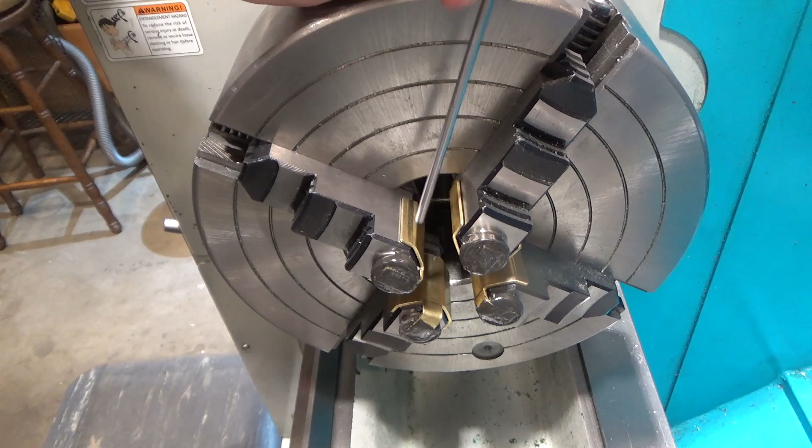So if you happen to watch one of my videos a couple videos ago, I made these soft jaws for my 4-jaw chuck for an upcoming project that's going to be rather involved. And one of the things I noticed at the end was that the placement of the magnets to hold the jaws on was on the top surface of the jaws, and that's a hardened ground surface that you can use as a reference. If you've got a part with a flange, you can slide it up to it.

So I am going to make a new version of these jaws where instead of having the magnet here, the magnet will be along the side, and it will hold the jaw in place without interfering with this surface. In order to do that, I'm going to modify my dies so that they can reference off of this wing that's going to stick off of here.

Also, since I'm going to be using the dies more, I'm also going to heat treat them, but they're made out of 1018 steel, which is only 0.18% carbon, and that's not enough carbon to really heat treat adequately, or even really at all, I think. So what I'm going to have to do instead is surface harden them, or case harden them, with some case hardening compounds, so I'll be doing that too.

And as long as I'm at it, I'm kind of curious, because these jaws move along a rail, how much they cant when you tighten them. So I'm going to put a part in this 4-jaw chuck and do some measurements and see how flat this surface really remains when you're tightening a part down, or can you really count on it if you're trying to do precision work.

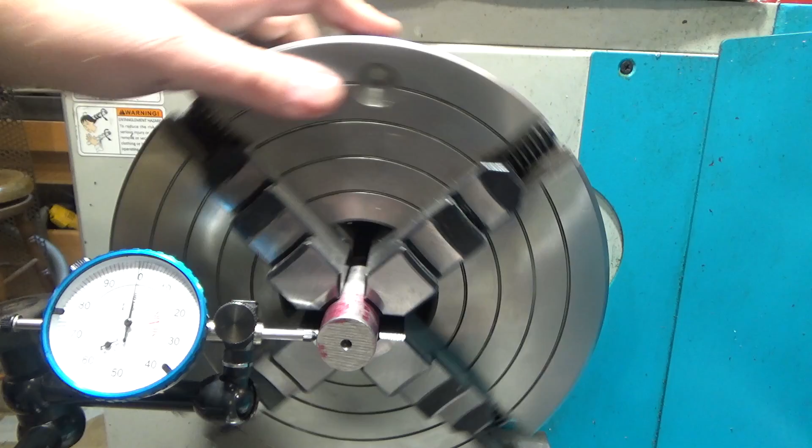So I stuck a part in here and centered it in the 4-jaw chuck. So the next thing I'm going to do is grab another indicator and put it on these flat faces and first see how well they line up with each other once it's tightened.

I assume that when they made this in the factory, they tightened all these down on something, or maybe on themselves, and then ground them flat to each other. But once you throw a part in, how well that stays flat along the travel of each jaw is an unknown here.

And then also I want to tighten just one jaw and see if it cants at all, because this rides along a track, and although the threads are engaging much of the bottom of this jaw, in reality with screws, when you tighten them, a couple of the threads hold the majority of the force and the other threads are looser. And if that's the case, this might cant a little bit, and I want to see if that's the case. So let's throw another indicator on here and see what we see.

So even though these jaws were likely all put in the chuck, tightened together or tightened on some reference part, and then ground to be flat, they only became flat at that one instance.

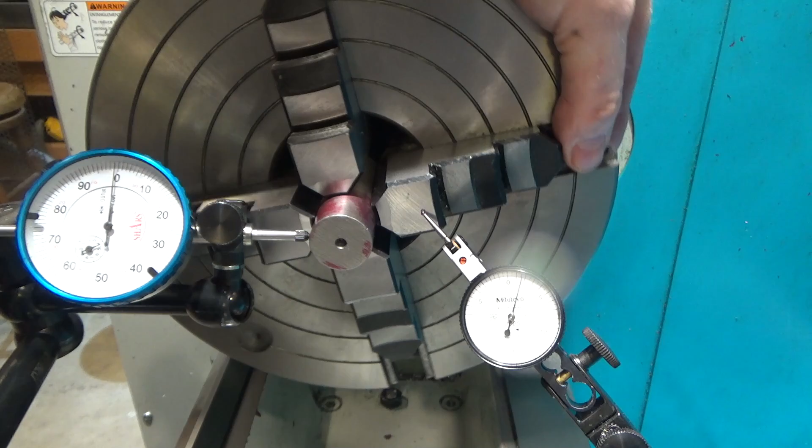And in reality, it's not terribly repeatable, my guess, because here's 0 on the jaw. You'll notice across the face of the jaw it varies by 1 thousandth. And as I come to the next one, it's plus 1 thousandth, doesn't reach the 0 at all, goes to plus 1.5 thousandths. And this one is minus 1.5 thousandths, going to 0 on one edge, and then plus 1 again, and then back to the original jaw. So I mean, I see a 3 thousandths range.

So if you're doing ultra-critical work, you really cannot rely on these surfaces as flat. Now, let me change my setup here, and let's see what happens when you crank on one and see if the jaw cants at all.

And maybe, in order to get this right, just throwing it out there, like tailstocks, when gunsmiths are going for ultra-accurate tailstock alignment, they will use a torque wrench to make sure to tighten the tailstock to get a repeatable measurement setup every time. So maybe, if you need ultra precision work, which I've never done and have no experience with, maybe you have to have a chuck, maybe a better chuck than this one, but on top of that, maybe you have to have a chuck that you can apply a known force every time, like either through a torque wrench or a hydraulic chuck, where everything is controlled with more precision for repeatability.

Anyways, let me see if the jaw cants at all. I'm going to change this up, bring it right back. So I've loosened the jaw, this top jaw here, and it was set at 0 when it was tight.

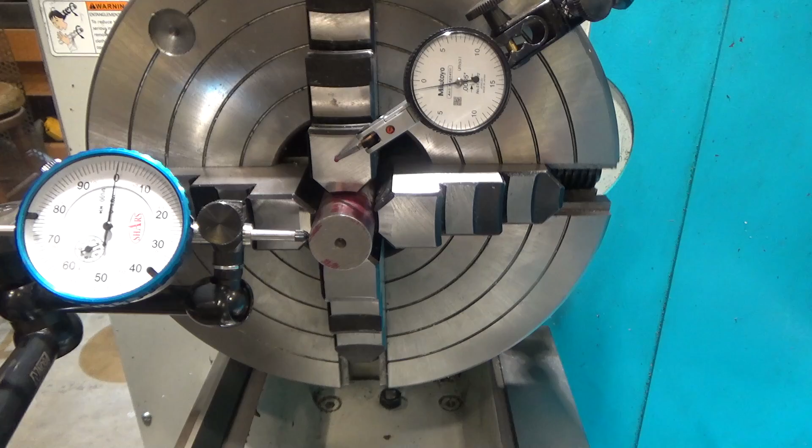So the moral of the story here is jaw pressure does affect how flat this is, and so it probably becomes important if you're doing precision work not to rely on these surfaces, especially if you can't guarantee you're going to apply even force on all the jaws.

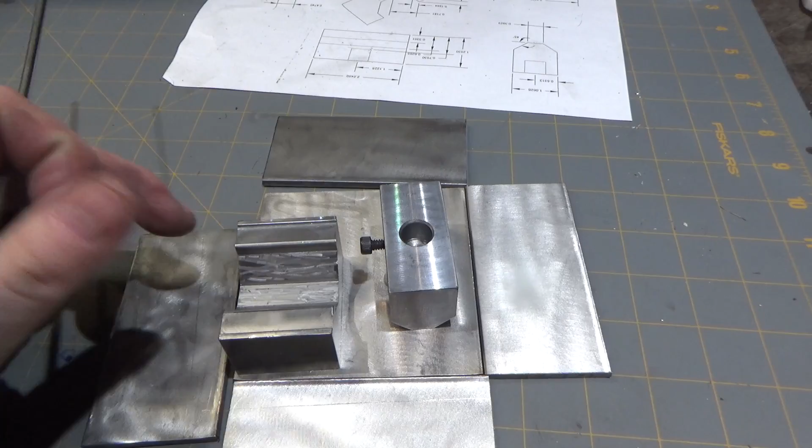All right, so let's go modify the die so that we can make the new soft jaws. As far as modifying the die is concerned, I am going to be taking a half inch off this ridge on the bottom to allow a reference point for the unbent part to slide into, and that will allow room for the wings to extend out the edge that are going to wrap around the side of the jaws.

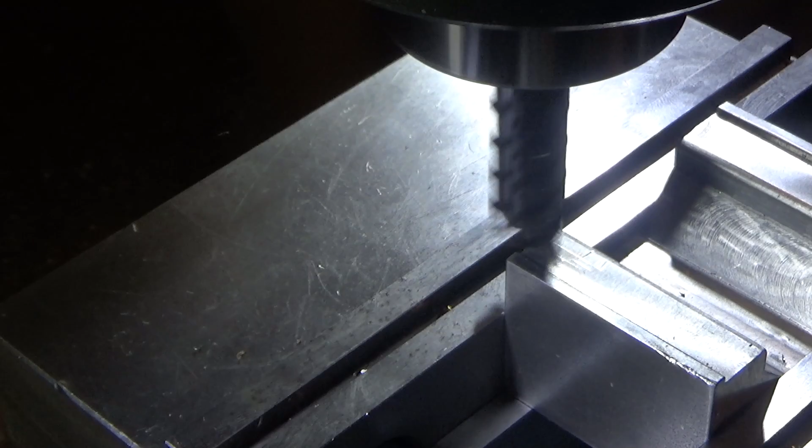So next stop, the mill. Maybe I'll do one side at a time here.

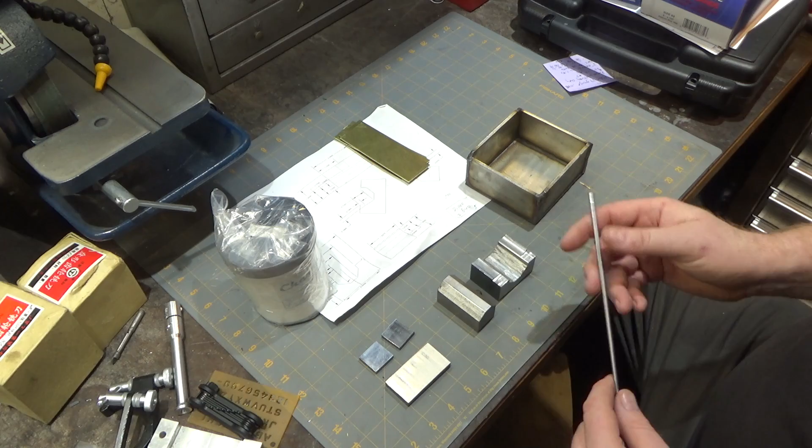Next up, before I actually make the new soft jaws, I want to case harden or surface harden the die and mold, and because this is cold rolled steel, it's very low carbon content and it's not hardenable on its own, so you have to use a product like cherry red in order to case harden it.

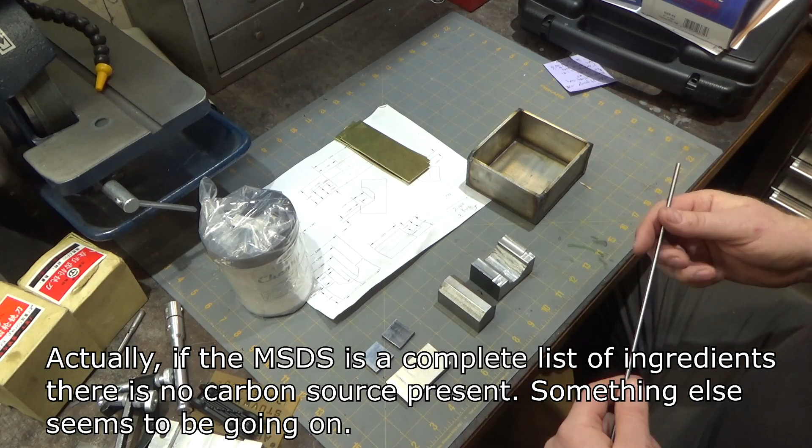What that does is you heat the material up until it gets to a point where carbon will dissolve back into the steel, and cherry red provides that carbon. It also provides a protective coating on it so it doesn't oxidize, so you don't end up with a thick oxide layer.

But I'm kind of curious, the normal method for using cherry red is you heat your part up until it's cherry red, thus the name, and you either sprinkle or dip the part in some cherry red, and it will form a molten black coating on the surface of the part. Then you heat it to cherry red again and hold it there for a while, and then quench it in water.

Now I'm curious, because that initial heating you do before you put the cherry red on it, I think it's going to expose the part to some oxidation. And I don't know if the cherry red has additional compounds in it that help dissolve the oxidation, remove it. I've never used it before, so I have no familiarity.

But what I'd like to do is try using it in two separate ways. What I've done is I took a piece of this cold rolled steel that's cut off, a little cut off piece that was stuck under my bandsaw, this piece right here, and this was one single piece. And what I'm going to do is measure its dimensions, its thickness.

I also made the surface fairly smooth and polished, because what I'm curious to see is I want to treat this two separate ways. The first piece, I'm going to case harden following cherry red's normal instructions: heat it up to cherry red, dip it in the material, heat it again, quench it, and see what it looks like.

The second piece, I am going to take this stainless steel box, and I am going to take the part in the stainless steel box along with these parts, since I want to do them the same way. It may make no difference, but what I'm going to do is pop this in the kiln, put cherry red all around it.

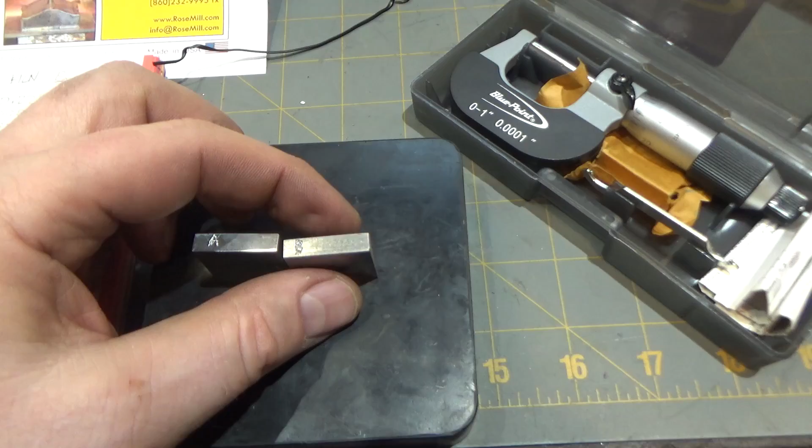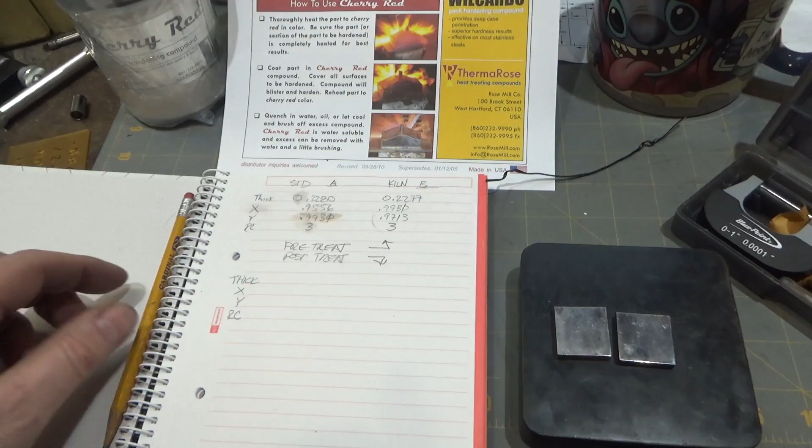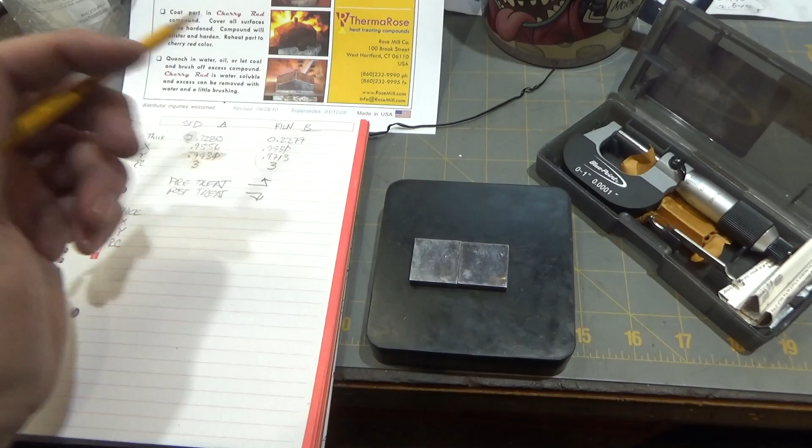Before we get started with the heat treating, I labeled the two blocks A and B, and on the backs noted the X and Y directions on each one. I took the thickness in the middle twice to confirm the repeated value, measured thickness in the X direction, the Y direction, and the rough Rockwell hardness. I used Rockwell C because that's what I had calibration blocks for. Probably would have been better to use Rockwell B for this unhardened material, since it's towards the very end of the scale, so my hardness meter probably isn't as accurate there.

So we're going to start by taking block A and heat treating it in the traditional cherry red fashion, which I previously explained, and take some measurements. Then the other parts we'll put together and I'll use my kiln instead.

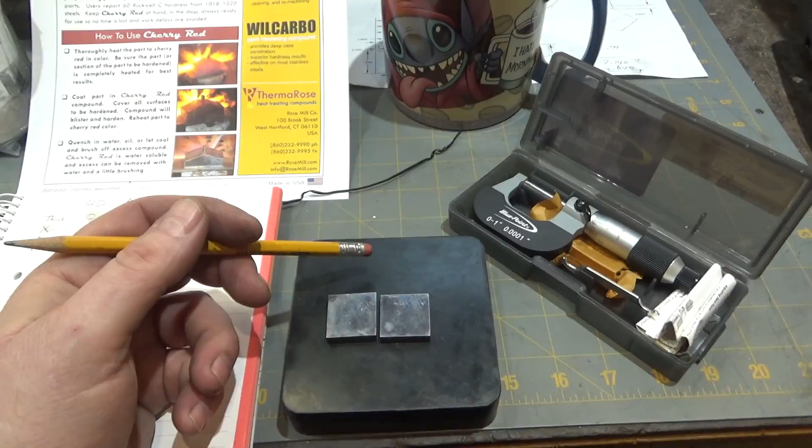Alright, we're going to try and catch this on camera. Hope it's successful, it's going to be kind of hard to fit in the image. Let's get our torch heated up here. Also wearing welding goggles, it's going to be hard to try and get this to red hot, cherry red.

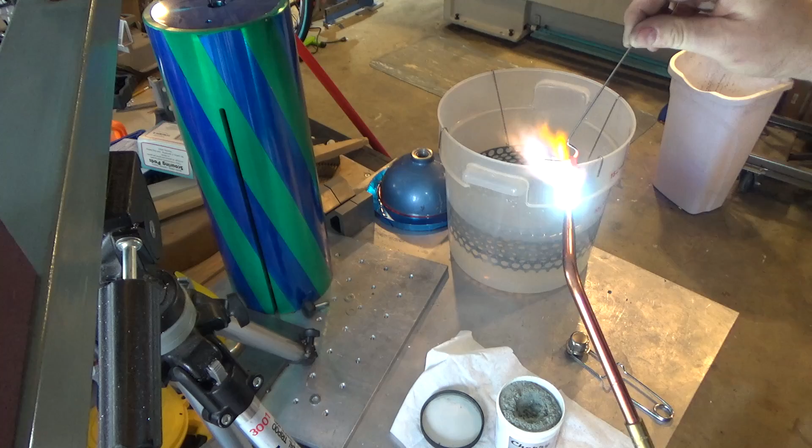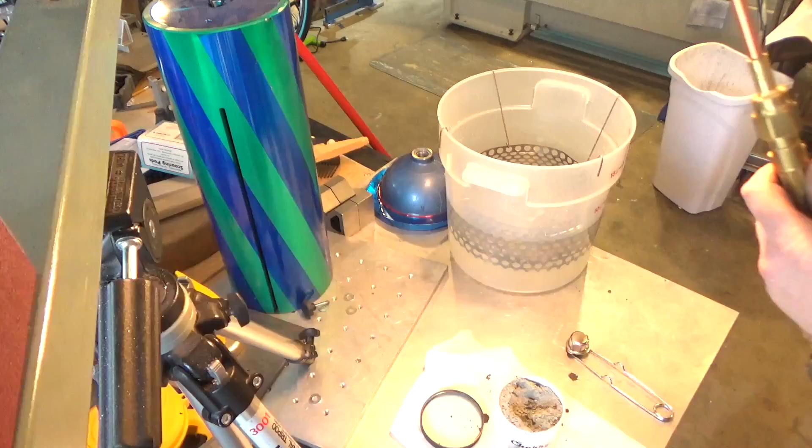Alright, I think we're there. We're going to dip, coat as evenly as we can, and then go right back to heating. The stuff melts, forming a protective coating, and I think maybe even removing oxidation. And it's cherry red right now, and we'll quench it. That should be it.

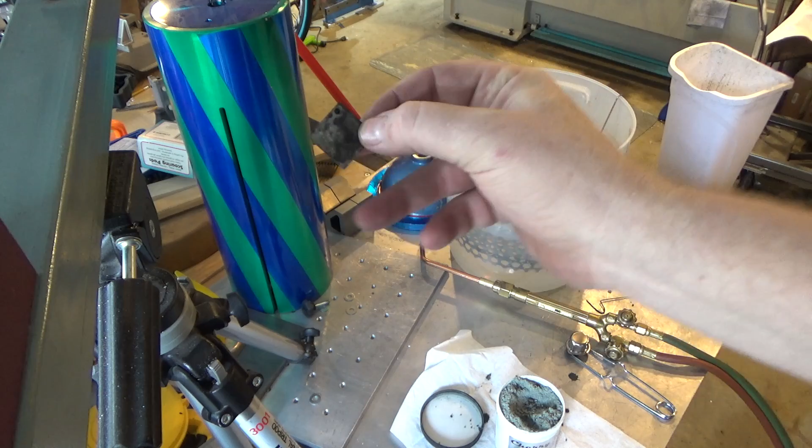We'll take some measurements, hope you could see that. So here's what it looks like after it's been quenched. I don't know if you can see it, but the material is kind of hardened onto it. The material just feels different right off the bat. Let's take it over and take some measurements.

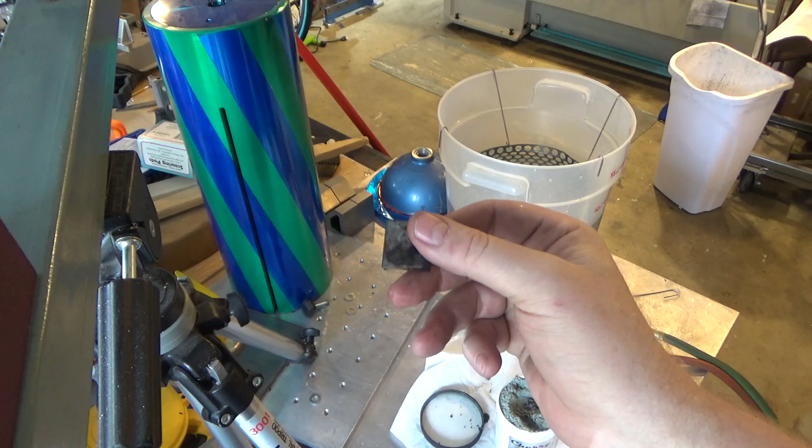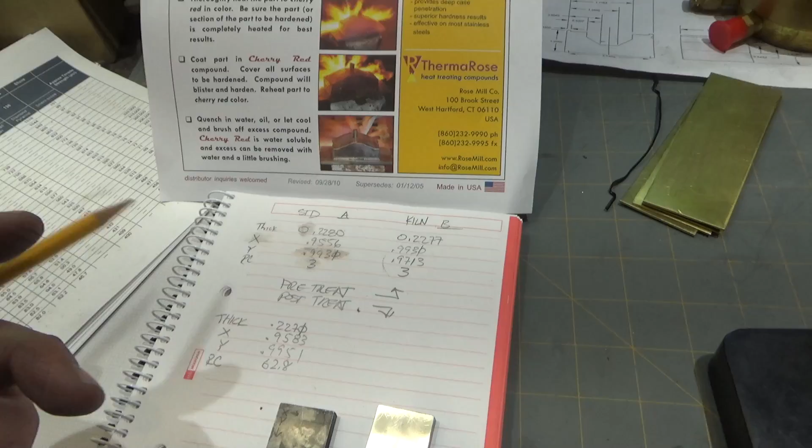So here we are after the first case hardening process, where we followed the standard cherry red process of heating it to red, etc. The dimensions were interesting: thickness changed from 0.228 to 0.227. The x-axis increased by about 1.5 to 2.5 thousandths, the y-axis increased by 2 thousandths, and the Rockwell hardness went from approximately Rockwell C3 to Rockwell 62.8. So the depth of the case hardening is probably pretty low, and what we'll try to do next is case harden this guy.

We've loaded all the parts in the stainless steel box I made, put it in the kiln, and set the program to ramp up to 1450 Fahrenheit and hold for an hour to give it time to soak all the way through. That's the general rule, an hour per inch of material, and some of it's about an inch thick. We've covered all the parts with the material.

We're wasting a lot more of the Cherry Red than we'd need to if we were doing the dip method. I'm just curious if this will help reduce oxidation. So next we're just going to start the program, and we'll be back.

Alright, so we're ready to do this. We're going to pull this guy out. Holy cow, is that hot?

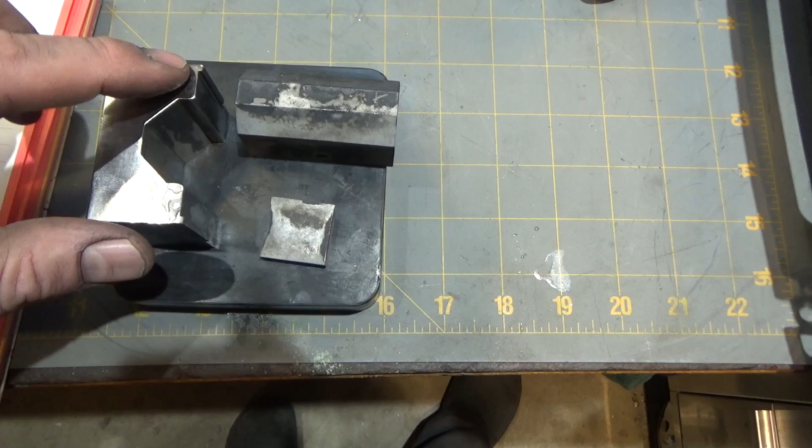So here's the part after case hardening. I took this to the Scotch-Brite wheel and cleaned off some of whatever this layer of stuff is. It comes up pretty hard, whatever it is. You'll notice the interesting patterns in it - looks like some of the material got lost, like it almost scaled or partially melted. Kind of interesting, considering the kiln was set to a very fixed temperature. But you can definitely see it, and it is very hard. I'll be interested to see how deep it goes.

So I'm going to take some polishing stones to this to polish the mold or die part of it. This guy needs a bit of work still. I just left this - you can tell this is where the material came off, and here's where the cherry red stayed on the whole time. It's very different than the way the other one looked. It did protect the metal, which is kind of interesting.

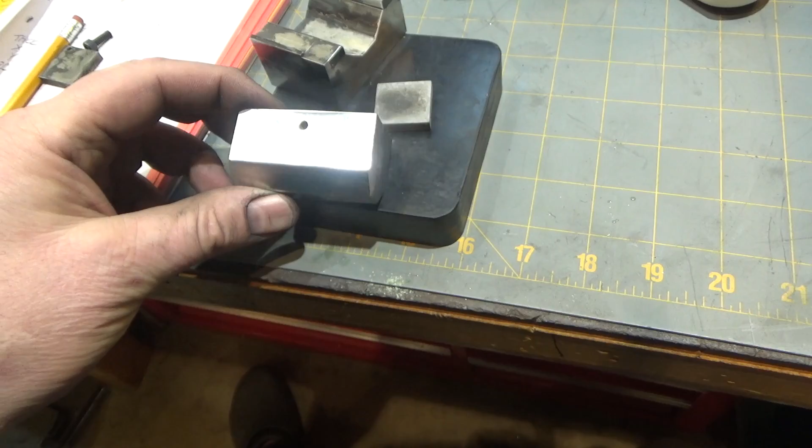Here is the little sample piece, and we can compare. This one was completely buried, and you can see the metal's a lot better protected. So it finishes pretty nicely, and it's pretty darn hard. Interesting, I just went straight across there - you see this is the area where the cherry red was completely covering the metal the whole time, here it was not. When I take it to the Scotch-Brite wheel, the damage, the oxidation is on the part that didn't have the cherry red on it. The other part cleaned up really easily - this side was mostly perfect, white like that, and cleaned up pretty nicely and easily. This side had a little bit of issue still, and it did not.

Next up, we should see what the measurements are on our test piece.

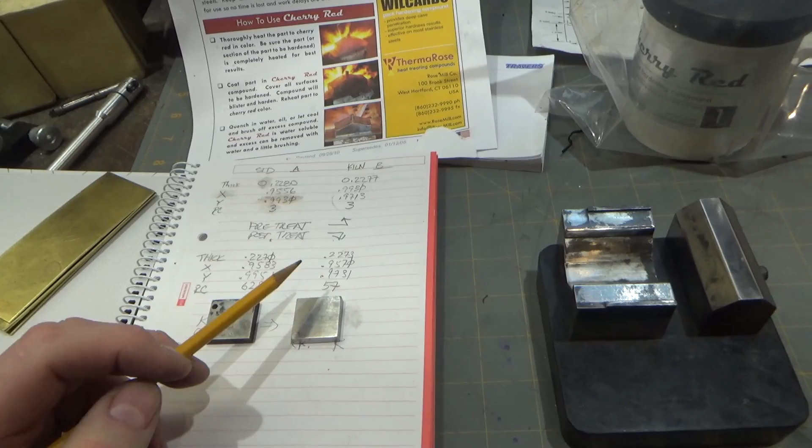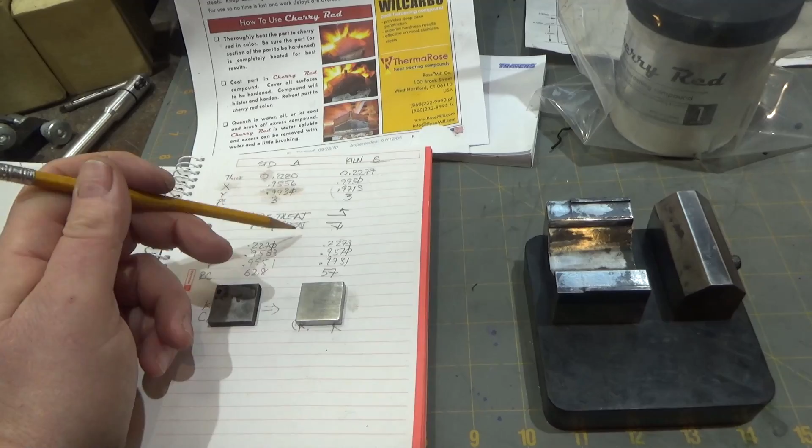Looking at the measurements of the second test piece after the modified case hardening protocol, where I heated it in the oven, the dimensions were sort of stable as well, just like the other one. The thickness went from 0.2277 to 0.2273, and that kind of four-tenths error could easily be just taking the Scotch-Brite to it, changing the difference - that's almost nothing. The x-axis changed a little bit more dramatically, going from 0.978 to 0.957, and the y-axis went from 0.971 to 0.973. So a couple thousandths increase there, but a lot of loss in the x-axis. A little bit different than the other one.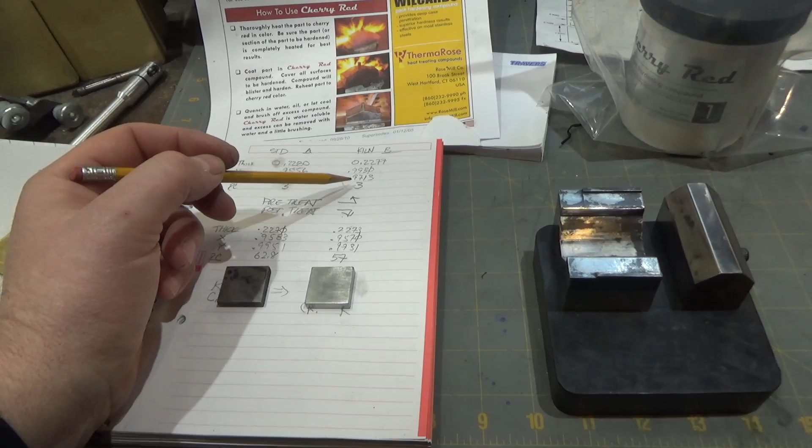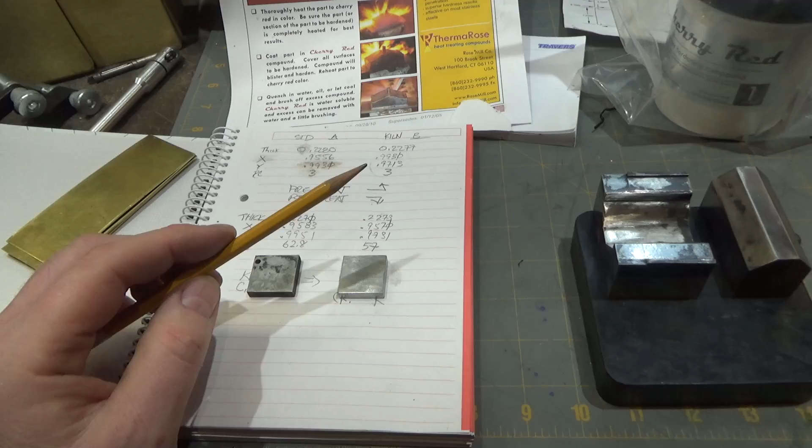It was much easier to clean this guy with Scotch-Brite. The hardness went from about a Rockwell 3 to a Rockwell 57, which I thought was particularly interesting considering the other one got harder. I went back and rechecked them again and came up with the exact same numbers. So for whatever reason, the second process wasn't quite as hard. I think that might have to do with the quenching, because the faster you quench it, the harder it'll be. The first one was just this tiny little ingot dropped in a lot of water. The second one had the water exploding all over the place, so it didn't remain in contact as long, so it cooled a little more slowly, and that probably explains this - just guessing.

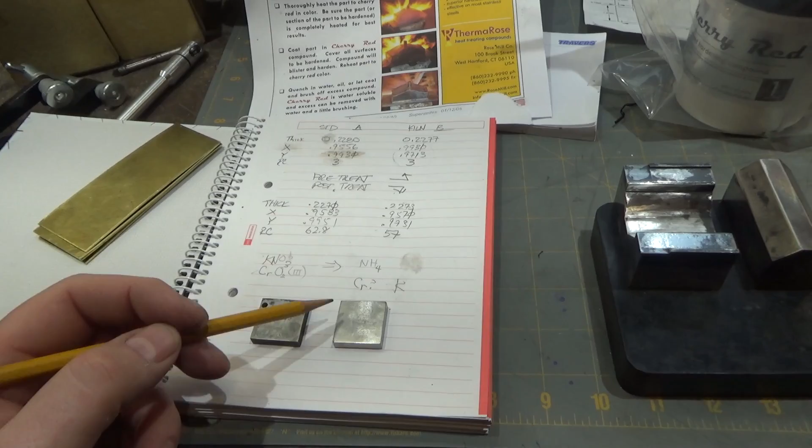I'm really kind of curious about the chemistry involved in this. Unfortunately, they don't give any information on the Cherry Red site. I don't know - there's potassium nitrate and chromium oxide in it. There's no carbon source at all as far as I can tell, unless the MSDS just doesn't list the carbon source. So it makes me wonder, are they actually adding chrome to the metal to make the outside hard, kind of like one of the chrome edge files they used to sell? Anyways, I'd love if someone knew what the chemistry of this was to let me know.

So I've mounted my two test samples, A on the left, B on the right.

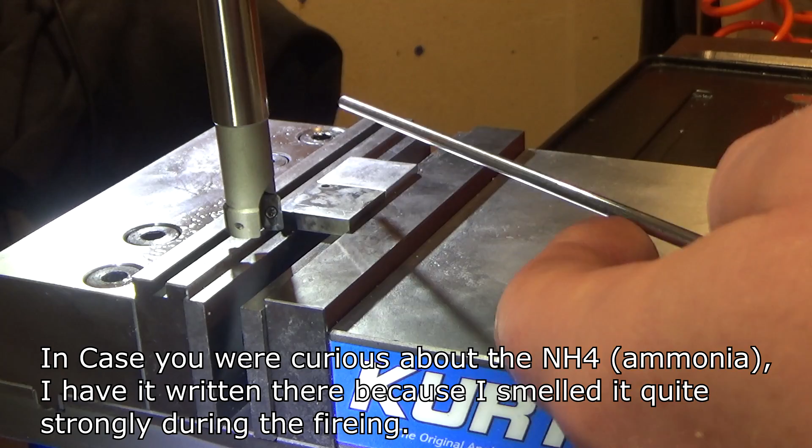A being the one that was case hardened normally, and the one on the right more deeply, I'm guessing. I'm hoping my carbide inserts will hold up to the hardness of these parts. May not, so I'm going to take like 2 thousandths pass across the top of this guy.

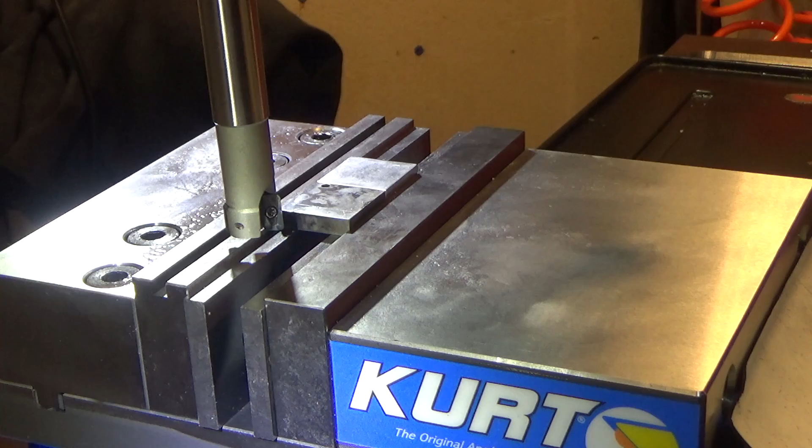We know the hardness of these two right now. This one's a little over 60, and this one's like 58. So I'll take a pass, measure hardness again, keep it up until I start to find a discrepancy, and let's see what the difference in depth of case hardening is for, say, a 1 minute exposure to the case hardening material, and about 2 hours total, but an hour at temperature. All right, let's do this.

I will say these really hard materials give a great surface finish. All right, let's measure some hardness. So here is the A block.

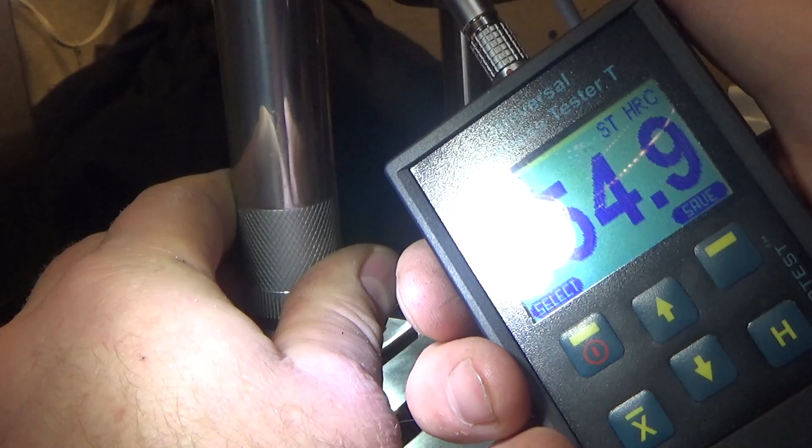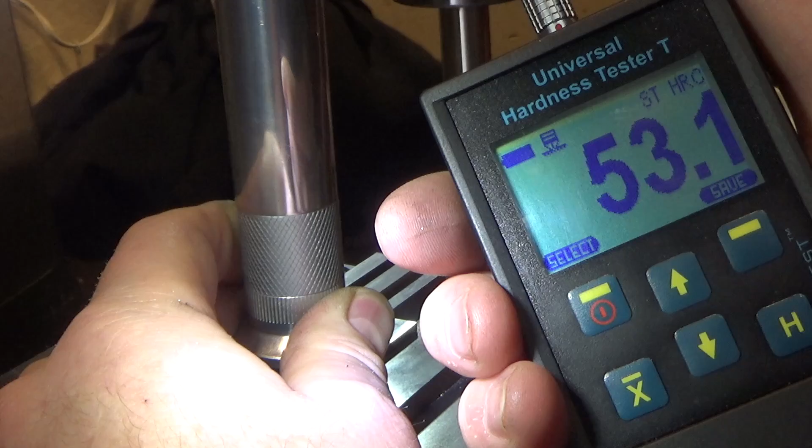Starting to fall off. The B block is staying pretty hard, only down a couple points. The A block is down a few. So let's take another pass and see what we get. Let's take another, say, 4 thousandths, and see if we completely break through on the A block.

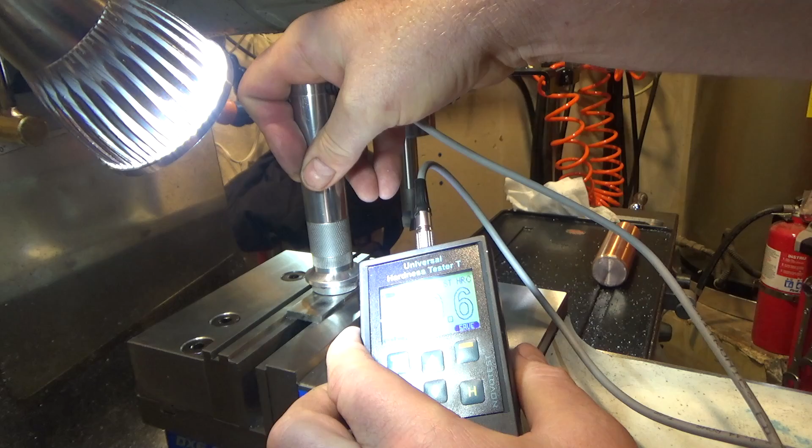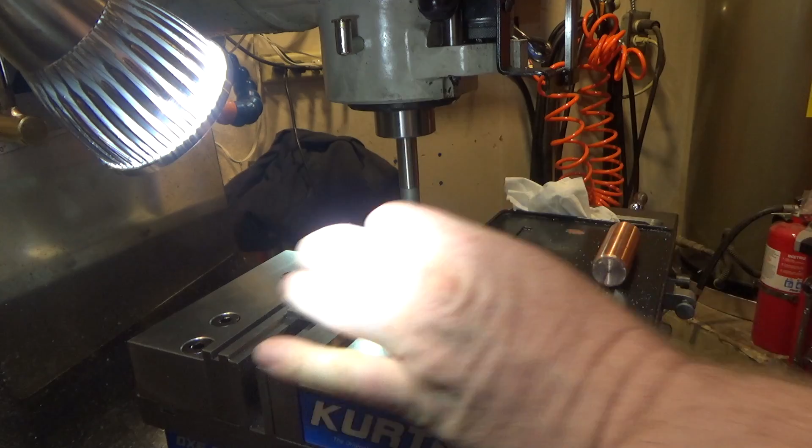So the one that I thought would be most deeply hardened actually has lost all its hardness about 10 or 15 thousandths down. The one on the left appears to have held it better, which is really interesting. I don't even know why that is. I can't begin to explain it. But yeah, it seems to have held a bit more of its case hardening than the one on the right.

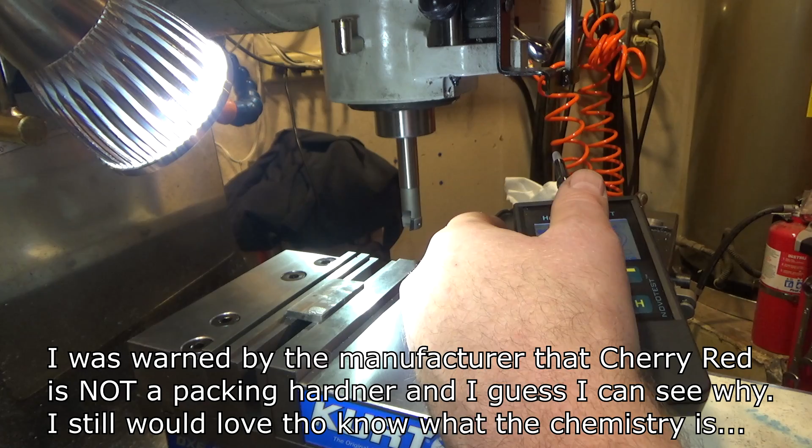You'll notice the finish has gone to hell. That's because the material's so hard it's damaged the carbide already. So a little surprising, and I can't explain the reasons why, but measuring repeatedly seems to show that the one on the right is almost down to base material softness, and the one on the left has still got a bit of hardness. I don't know why that is.

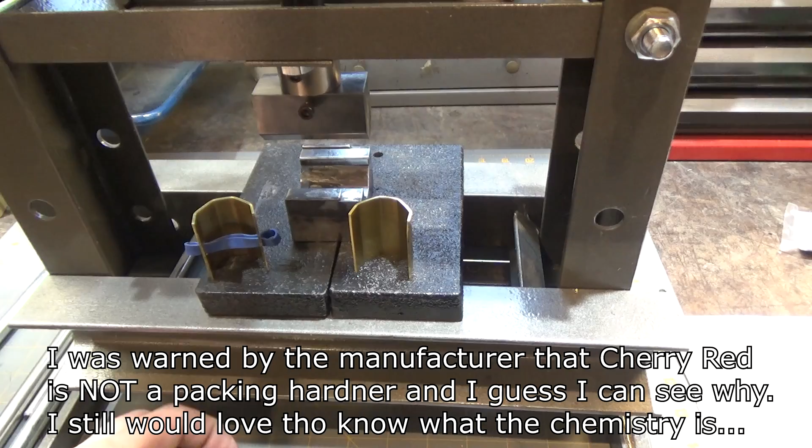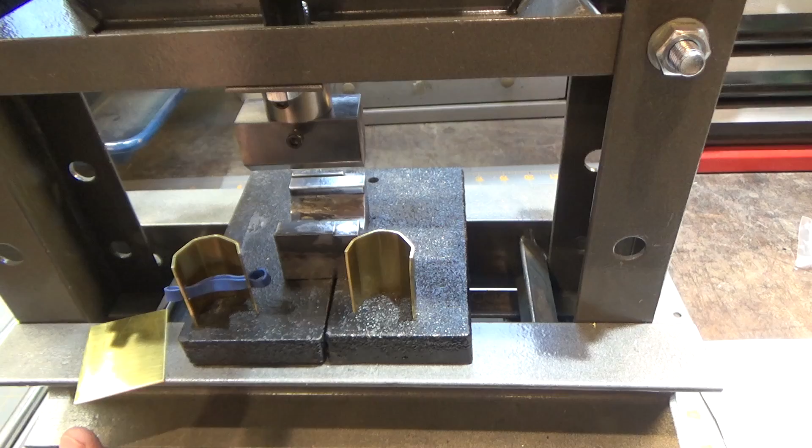I learned a lot in the process. I tried a couple variations. Originally I was going to have a long tail sticking up on one side, that's why I milled the bit, and I didn't really like that. I don't think the magnet will have enough drag to really keep it in place adequately. There doesn't need to be a lot of force, but it tends to move around anyways and attract a lot of iron filings or steel filings if you're doing steel.

So I think it's going to work out just to do the style that is friction fit like this. And interestingly enough, I can just reload it in the die when it stretches out when I use it in the vise, and reform it, which is kind of cool.

I thought about this variation where I'd punch some holes in both sides, put pins in here, and use rubber bands, and it holds on really nicely, but I'm a little concerned that the coolant or lube will dissolve or weaken the rubber bands, or when they break, you get those little pins flying off. Now, I wear safety glasses, but still, you don't want flying objects. You don't want to plan that into your design.

I learned a lot on this project about case hardening, and certainly what not to do when you're quenching. If you have a square box container or even a hollow cylindrical container, if you dump that in, anything other than sideways, the water creeps up equally along the outsides and then dumps into the middle. When it dumps into the middle, it'll flash evaporate and cause a lot of pressure pushing to the middle. So all the remaining liquid in the middle has only one place to go, and that's up, which is what happened.